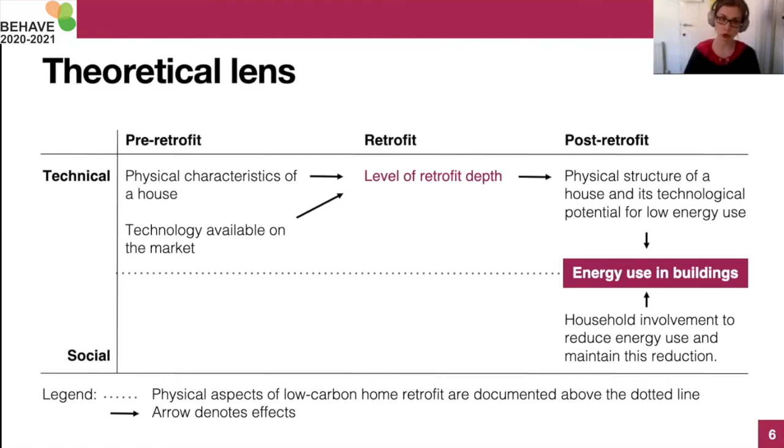In energy retrofit, such socio-technical interactions shape the level of retrofit depth, in pink in my figure, and the level of energy use post-retrofit, also in pink. The known physical aspects of low-carbon retrofit are documented above the dotted line, and other socio-technical aspects will be discovered as the result of the meta-synthesis. So you'll see the same figure filled in when I show you the results.

So we used qualitative meta-synthesis as our literature review methodology. Qualitative meta-synthesis is a systematic approach for collection and analysis of qualitative studies, with the focus of synthesizing their findings with the use of qualitative methods. Meta-synthesis is more than a summary of findings; instead, it offers novel interpretations of findings and a possibility to construct larger narratives than in any individual study.

5 search terms were used: energy, home, retrofit, homeowner, qualitative research. These 5 key terms, together with their synonyms, formed 61 search concepts used in the search. The search recall was more than 1,500 articles, and their titles were scanned.

25 articles depicted qualitative studies on energy retrofit in single-family owner-occupied homes. In only 10 out of these 25 articles were cases presented in great detail, and we needed such level of detail for the application of the process lens to the analysis. These 10 articles constitute a combined sample of 94 cases, and 18 cases depicted energy retrofit in single-family owner-occupied dwellings and were also presented in great detail.

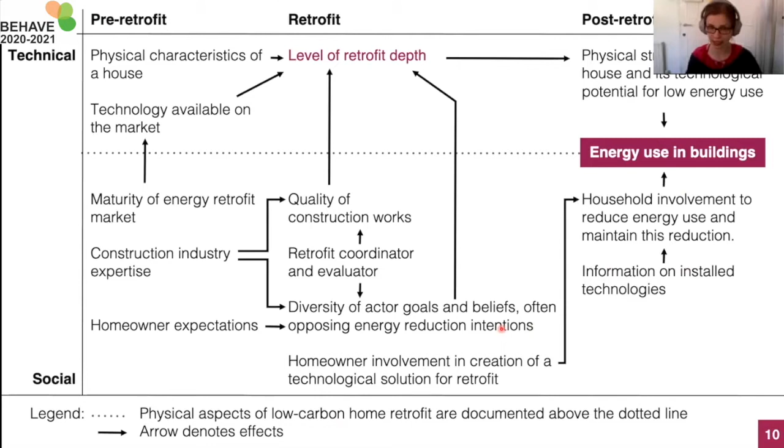So policy implications. The first set of policy recommendations relates to the conception and realization of the deep retrofit solution. So a proximate policy suggestion is to have a project coordinator to coordinate different actors for a given retrofit who would outline a system approach to retrofit.

An ultimate policy suggestion is to build expertise among the retrofit team, develop the market for low carbon technology for retrofit, but also inform homeowner expectations prior to retrofit. A promising route seems to be a proactive delivery of general and house-specific information on deep retrofit options to homeowners by local authorities.

The second set of policy recommendations relates to post-retrofit behavioral change necessary to realize technological potential for carbon savings. A proximate policy suggestion is the provision of relevant information to homeowners on how to operate the installed technology. An ultimate policy suggestion...

is to outline pathways on how occupants, including homeowners, can be actively included in the process of design development, as the meta-synthesis highlighted that the homeowners were more likely to adapt their practices if they were involved in the creation process of a technological solution for retrofit. Maybe the insight is more related to tenants.

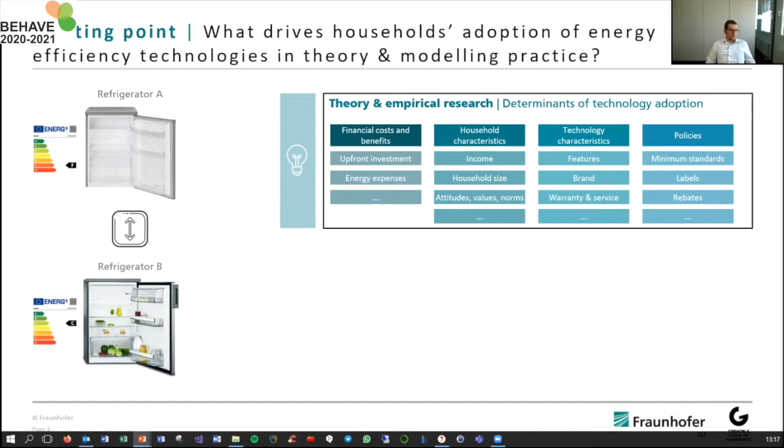So there's a whole range of determinants that at the end of the day set the course for which technology a consumer purchases. This not only applies to refrigerators as in this case, but also to other energy efficiency technologies, be it building renovations, heating systems, etc.

However, when we look at how these very complex decision-making processes are typically modeled in energy simulation models, we most likely end up with a so-called total cost of ownership approach in one way or another. What is quite established in different models, including PRIMES for example, is this approach of measuring the total cost of ownership of one technology option based on investment, energy expenses, discount rate, lifetime, etc. And then calculating a yearly market share - the percentage one technology option has in the overall sales per year. This is quite a common approach, which obviously does not take account of these complexities of purchase decisions.

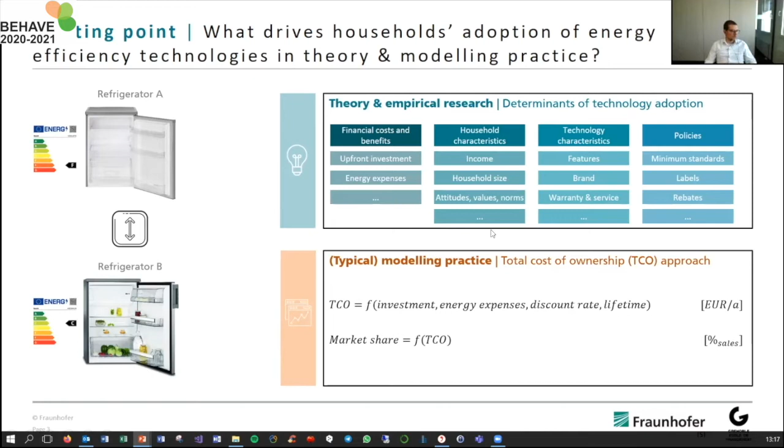Against this background, the objective of our paper and our research was to integrate empirical findings on technology adoption behavior into bottom-up energy simulation models, and based upon that, to measure the long-term effects of major EU energy efficiency policies on adoption and corresponding final energy demand.

Our starting point for this was a literature review in which we, as I just showed in the previous slide, tried to identify the empirical findings on energy efficiency adoption and its determinants.

Second, we carried out comprehensive surveys in which we empirically analyzed the determining factors for technology choice. These surveys were carried out in 8 EU member states. Within these surveys, as I mentioned before, so-called discrete choice experiments were carried out.

Afterwards, the empirical data from the surveys was used to parameterize the investment decision-making in the bottom-up energy demand model FORECAST, which deals with the residential sector in the EU. Finally, we carried out scenario analysis to simulate the long-term adoption of white appliances - refrigerators, freezers, washing machines, etc. - in the EU 28 in response to policy instruments. In my presentation today, I'd like to focus on the survey, the model implications, and the scenario analysis.

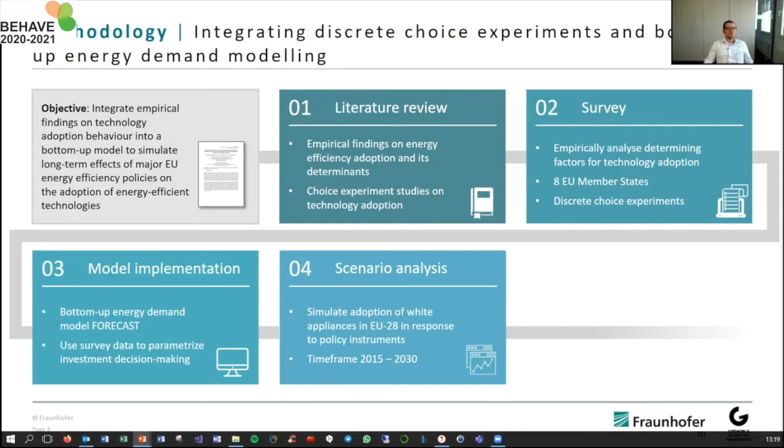So let's have a look at the survey itself. The core of our empirical research were these large representative household surveys. These were carried out in formerly 8, now 7 EU countries plus the UK. Data collection took place between July and August 2018. We had a total sample of about 5,000 households in the end that we could analyze.

As I said, the core of these surveys were the so-called discrete choice experiments. This is a way to measure hypothetical technology adoption on the side of consumers. That means consumers are presented with various technology options to pick from that differ in terms of price, features, size, dimensions, etc. And then taking all of this data together, this allows us to come up with an overall understanding of what the major determinants are for technology adoption.

So just to show you a couple of key findings from these discrete choice experiments and from the survey: what's perhaps most obvious is that the willingness to pay for higher efficiency classes - for example, for a triple-plus labeled refrigerator - is positive in all countries. That means consumers are more likely to purchase more expensive appliances if there's such a high energy efficiency label. Moreover, we found that subsidies or rebates increase the willingness to pay for high efficiency refrigerators in all countries except the UK.

Let's move forward with the scenario analysis itself. So what did we do here? Basically, we defined a range of 5 scenarios. First, a current policy scenario, which is basically a business-as-usual scenario against which the other ones can be compared.

Second, we investigated the effect of rebates that are dispersed to low-income households for the most energy efficient household appliance available in the respective categories. For example, for refrigerators, this would be the A triple plus category that would receive a rebate.

Third, we did the same, but instead of only dispersing the rebate to low-income households, we did so for all household groups. Fourth, we tightened the so-called minimum energy performance standards, or MEPS.

These were tightened in a way that only the two highest ranking energy efficiency classes available in the market were allowed for sale. And finally, we had a best available technology scenario, which basically represents the upper bound of energy savings, or the technical potential of energy savings possible for the countries investigated.

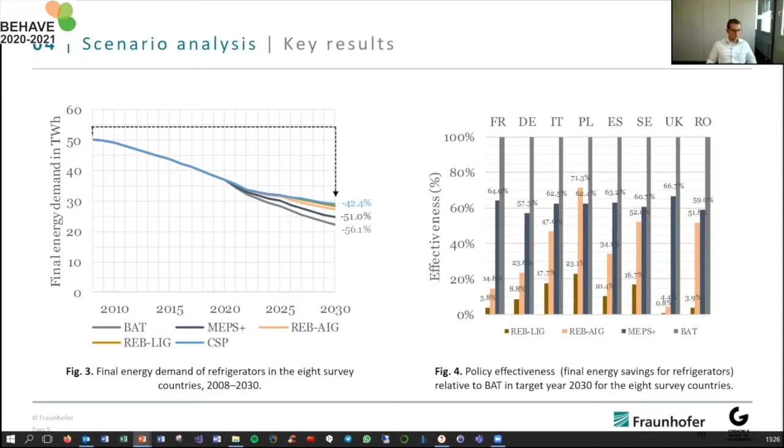So let me conclude on our modeling approach.

On the pro side, the major benefit of this approach is that we have an empirical substantiation of scenario projections. That means we move away from the simplistic approach of using total cost of ownership as a proxy for the actually complex decision-making in the household sector.

Second, we're now able to represent a very diverse set of consumer groups that distinguish in terms of income levels, environmental awareness, and household size.

Third, the results I just showed are just a very small sample of the larger analysis we carried out as part of the Cheetah project, which shows that this approach allows for very detailed policy analysis.

The limitations of this approach are as follows. The coverage of the survey countries was limited to 8 EU countries, while these represent about 75% of the formerly EU 28. There are still some country gaps that we try to fill through cluster analysis.

Second, we have the problem of projecting cross-sectional survey data from a single year, 2018, to future years. Obviously preferences are not set in stone and can change when we look at a long-term perspective until 2030 or even 2050. So it's somewhat questionable to what extent this empirical data can be reasonably used in a long-term view.

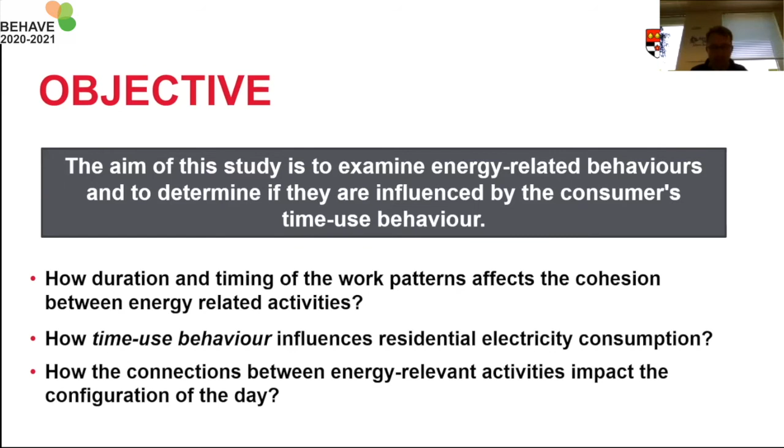Now let's start with the short literature review. Our starting statement is that in order to investigate mechanisms for energy-saving interventions, the use of time should be considered as a key element for the study of residential energy demand.

There is already a large body of research suggesting that efforts to reduce domestic energy demand need to consider people's time use patterns. However, we argue that these researchers examine only a subset of time use behavior, focusing on particular forms of energy such as electricity, leaving the causal impacts of residents' time use behavior on energy consumption unexplored.

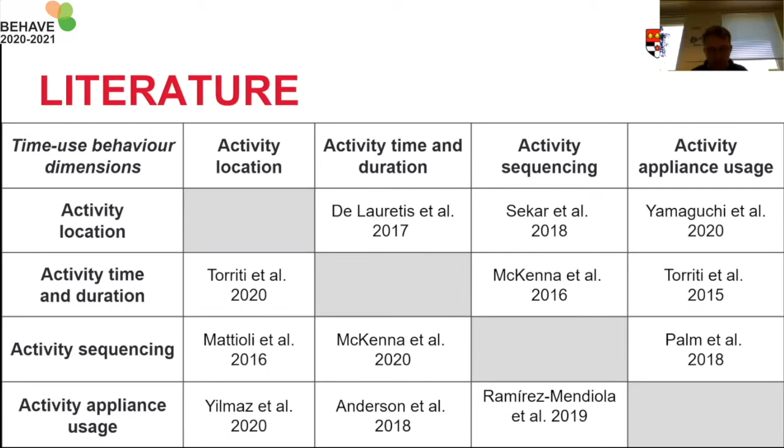What is an energy-relevant activity? Some previous studies aiming to understand residential electricity consumption patterns mainly use national time use surveys. But you need to know that although these time use surveys provide information on the timings of residents' activities, activity duration, and the involvement or absence of other individuals in these activities, they do not provide information on the appliance used to perform each activity.

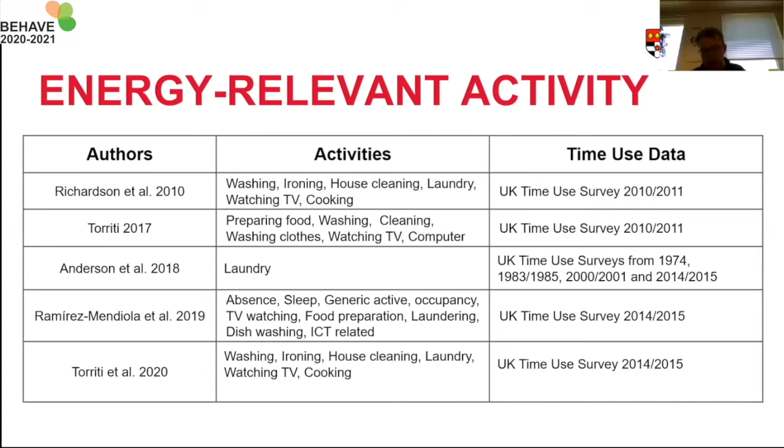Existing research on domestic energy consumption depends mostly on separate data sets, including time use surveys, time budget surveys, household expenditure surveys, or simulated electricity data, and based on this, energy-relevant activities are created. We argue that by relying on different data sets, the energy required to power each activity cannot be accurately assessed.

So this would require introduction of new dimensions that measure or explore time use behavior. So probably you ask me what actually is time use behavior. We argue that the following four interconnected dimensions are used for estimating time use behavior: activity sequencing, activity location, activity time and duration, and activity appliance usage. They are interconnected themselves, and this approach gives insight into everyday activities' characteristics, as well as how residential energy is consumed.

Let's present these four dimensions. First, the activity sequence dimension indicates the order between different types of activities. Second, individuals engage in these activities in different locations, such as home, workplace, or on the bus - this is what defines the activity location. Due to the limited amount of time available, the duration and timing of activities differ as well. A longer amount of time spent on work-related tasks allows less time for other types of leisure-related activity.

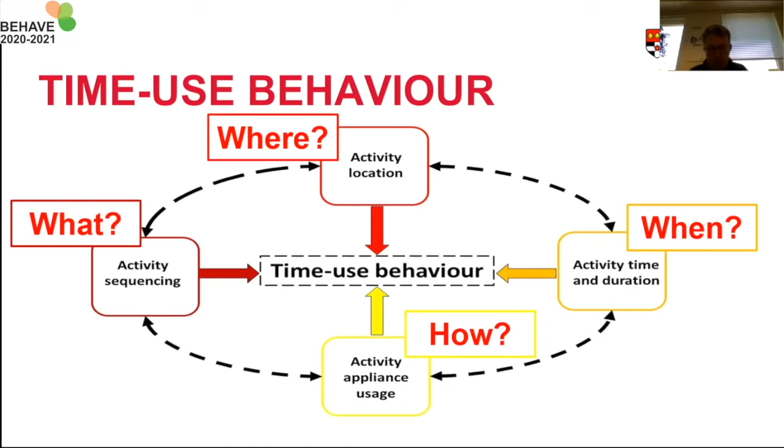In their daily life, individuals use different appliances to facilitate their daily activities, and this is the activity appliance usage dimension. As a result, we suggest that domestic electricity consumption is directly connected with the sequences of activities, activity location, time of operation, and appliances used in activities, which define these dimensions of time use behavior.

Based on this, we wanted to study this. Our initial approach was the time use diaries, the most recent time use diary from the United Kingdom, 2014-2015, as well as the week-long work diaries in which people recorded their different work schedules. The time use diaries and the week-long work diaries were filled in together, so you had to provide at the same day a week-long work diary, a work-day long diary, as well as a time use diary. The second stage was identifying these various work patterns that occur on a weekly basis.

The third step was dividing the sample into two categories based on the weekly duration of work. We divided the sample into those who reported working more than 35 hours during the week and those who worked less than 35 hours during the week. Those reported working less than 35 hours per week are students, parents, retired people, and other part-time workers, but also there are a number of workers who hold two or more part-time jobs. In the other group, mainly we have lone parents and couples with more than one child, and other full-time workers.

The main decision was based on the UK government contracts and employment working hours document definition. However, it's not so clear in the UK what actually means part-time, or how many hours part-time workers need to work.

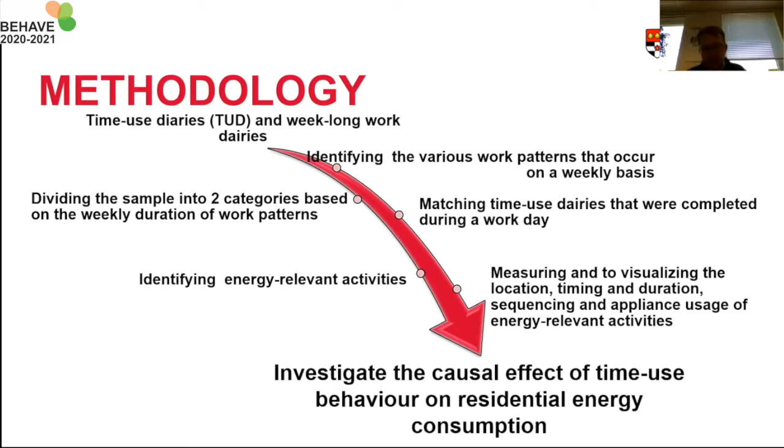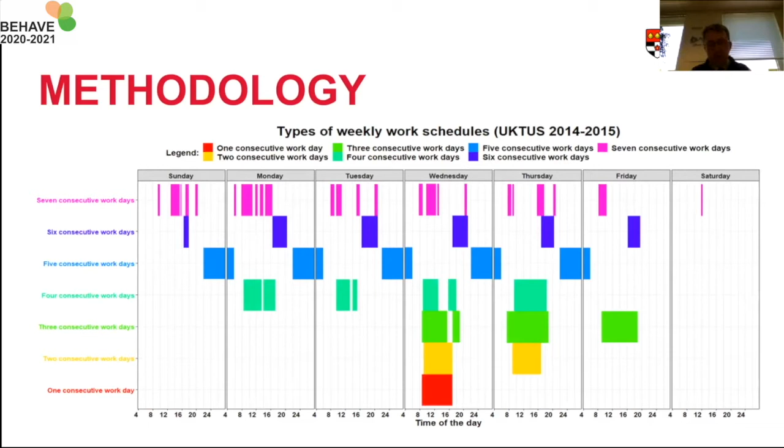Before we jump into the results, I need to tell you what kind of work patterns there are. In this presentation, I'm mainly focusing on consecutive work days, meaning there is no gap between the work days. The week starts on Sunday, and people who started their work on Sunday will end their work schedule on Saturday. Those who started their work on Sunday and work 6 work days will end their work schedule on Friday, and so on. The most important thing is that there are no gaps between the days.

Also in the case of sequencing, what we try to do is introduce the betweenness centrality measures - all our abstract is around the sequence measures and metrics, so I will be very short on this. Betweenness centrality is a widely used measure that captures a person's role in allowing information to pass from one part of the network to another. In this case, it is used to identify energy relevant activities that play a bridge-spanning role in a sequence.

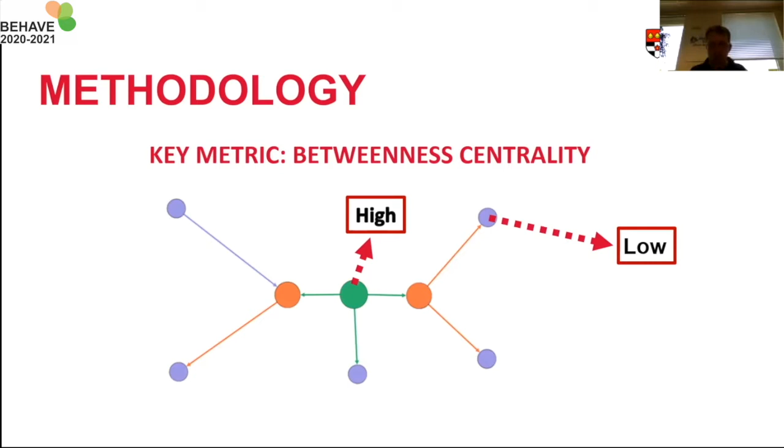Okay, moving forward, results. So this is activity location.

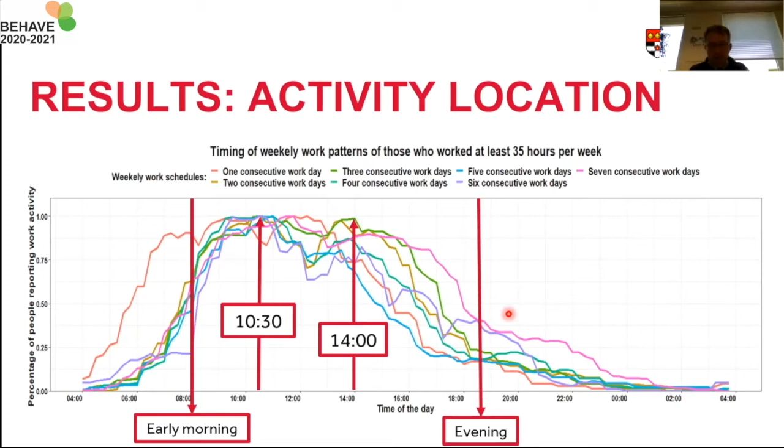In this case, the highest number of people at work is recorded at 11:30, and the afternoon peak occurs around 3:45 p.m.

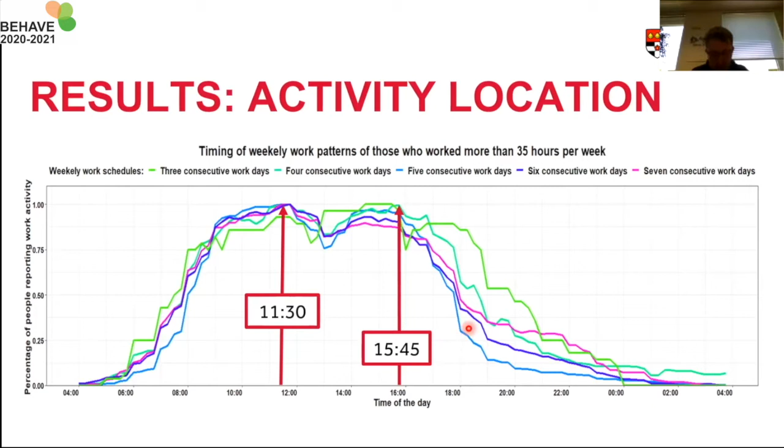Mate, I apologize to interrupt. We need you to conclude. You are already over time.

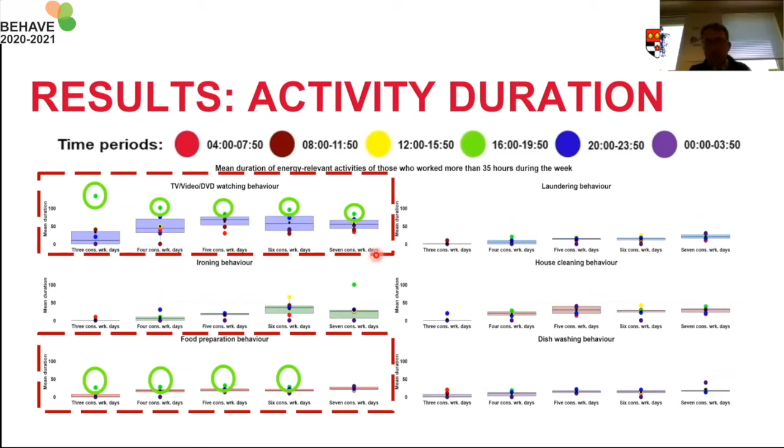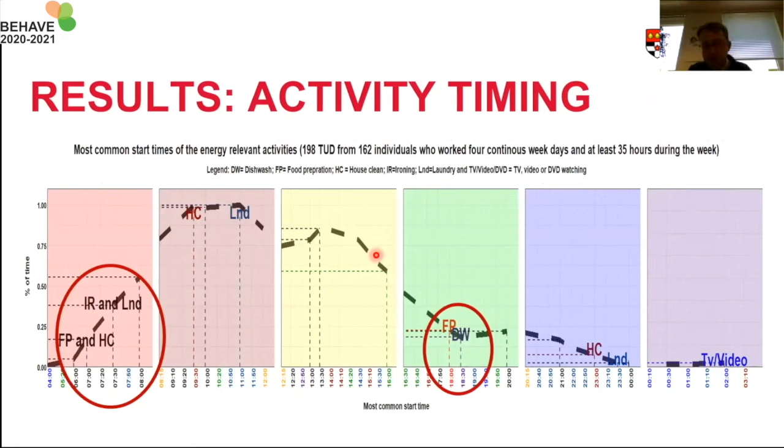Thank you. So basically, what we can observe based on different kinds of measures is that the two different kinds of patterns differ. Also, using the activity timing, we can observe there are some fixed activities that in both samples start at the same time. Moreover, we can observe that some energy relevant activities have the same common starting time.

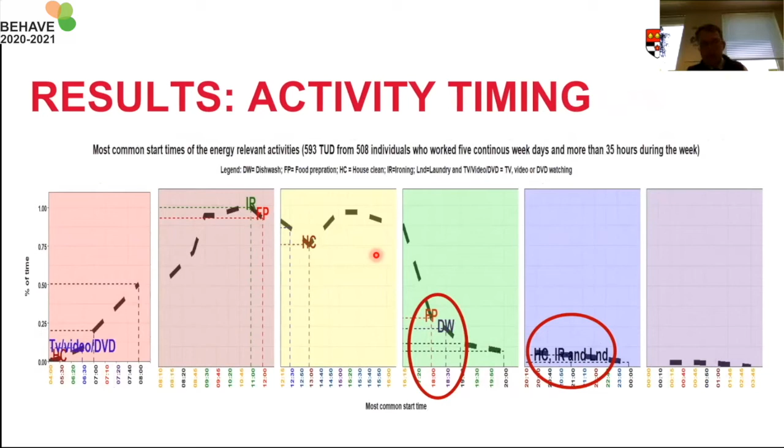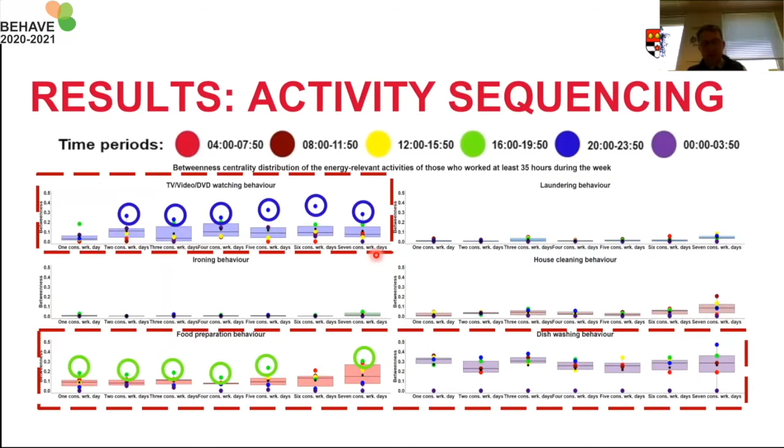The betweenness measures help us see which energy relevant activities connect and which are important during the day. So, just to conclude, this is the time use behavior.

What is suggested by this plot is that in the case of those who reported working at least 35 hours, individuals used the TV to perform their mass media activity. During the 20:00 to 23:50 time period, this consumed approximately 0.103 kilowatts of electricity.

And of course, this could be influenced by different kinds of policy measures. I would argue, from a policy making viewpoint, if we want to reduce this part of energy consumption, we can instruct individuals to perform the mass media activity later or earlier, or to shorten the mass media activity time—this is the duration dimension—or to increase the electricity price during this period—this would be the timing dimension—or to promote more energy efficient appliances.

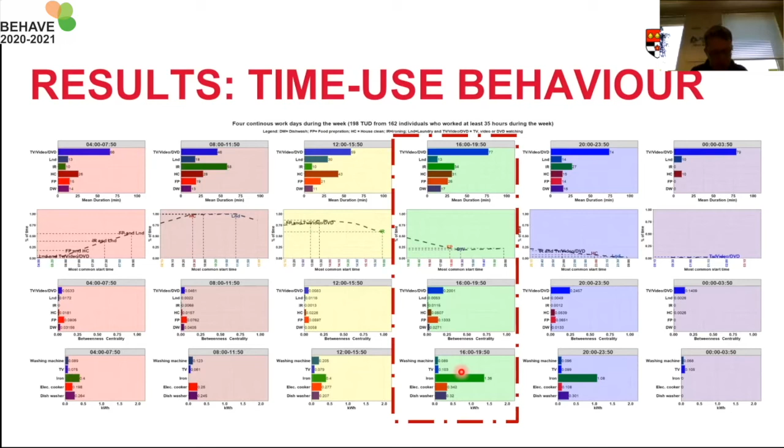So in short, from an academic perspective, the causal effect between time use behavior and residential energy consumption may be influenced by employment status. From a methodological perspective, our framework provides a structure for addressing the causal relationship between time use behavior and residential energy consumption. And finally, from a policy perspective, the development of policies that include the 4 dimensions of time use behavior would allow policymakers to target specific groups of the residential population and steer their behaviors in order to achieve energy savings.

Apologies, Marta. Thank you, Marta, for this last effort to get through in time. Thank you, but interesting results. Let's have time to discuss them at the end.

So let's proceed to the next presenter, Giulia Chersoni. Apologies for not pronouncing it properly. Don't worry. Marta, you need to unshare. Yes, I'm just trying now. Yeah, or Giulia can. Okay, thank you. And Giulia is bringing us an agent-based...

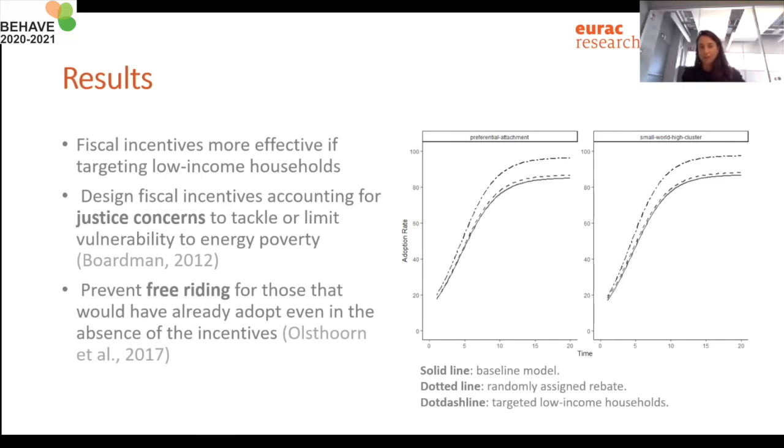So to conclude, we start from the evidence that there exists an energy efficiency gap—a gap between the optimal investment in energy efficiency and what we actually observe.

And we use behavioral economics and innovation diffusion theory to bring into the discourse not just the economics component, but also the heterogeneity in the behavioral components, so the intrinsic motivation that drives the adoption, and also the social structure, the interaction that may affect your choice.

And we combine this theory, these two approaches, into an agent-based model that we use to simulate two different types of intervention. As a conclusion from the results of the policy incentives, what we can say is probably that a combination of behavior-informed and more traditional types of intervention will be more effective in promoting adoption.

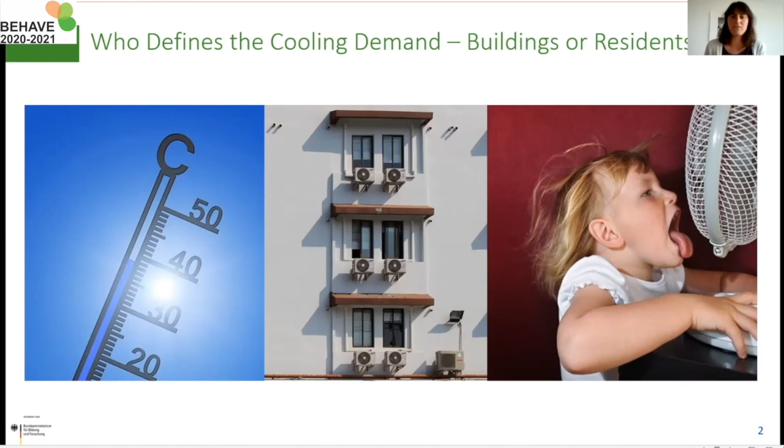So, the question is, who defines the cooling demand? Is it the building or is it the residents? As you all may know, building standards usually define certain temperature thresholds which determine cooling demand and overheating. And usually the residents' feelings or perceived thermal comfort are not taken into account.

So we set up a mixed method study in Munich, Germany, where we wanted to compare the computer simulation of cooling demand and heat stress with temperature measurements in different apartments and households, and the people's own perception of heat in their indoor environment.

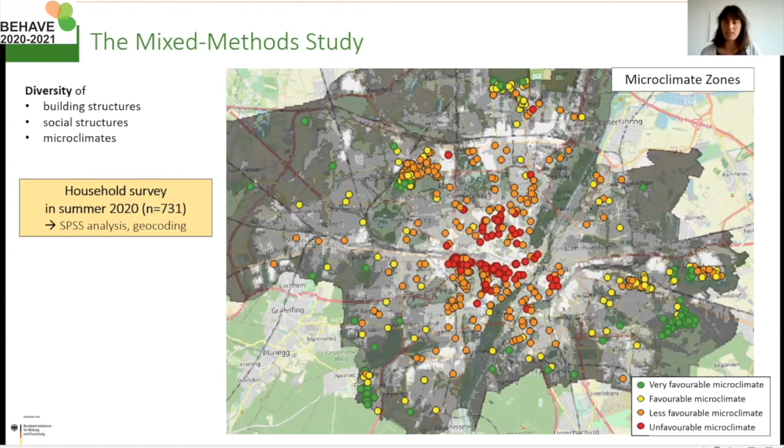We conducted a large household survey among more than 700 participants all over the city. As you can see, they comprise different building structures, social groups, and also microclimates that are on the map. More than 340 of those households also volunteered to measure the temperatures in their bedrooms for 2 months.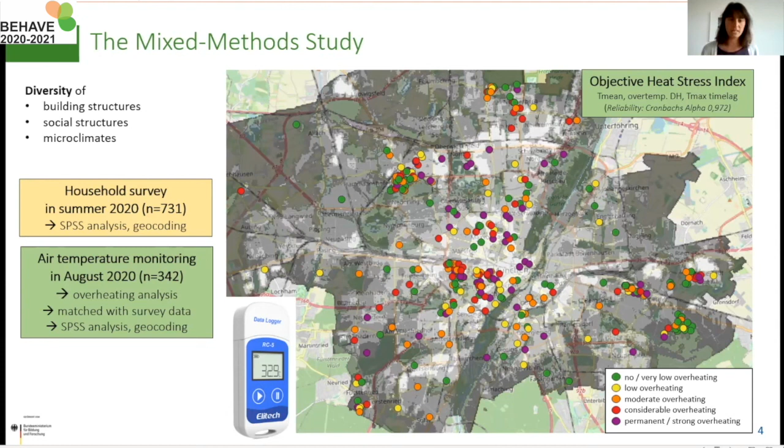During the summer of 2020, from July till September last year, we matched the survey data, their answers and perception, to these temperature measurements. And we created two heat stress indices: one subjective heat stress index and cooling demand, and an objective heat stress index based on the temperature measurements with those data loggers that you can see here on the left.

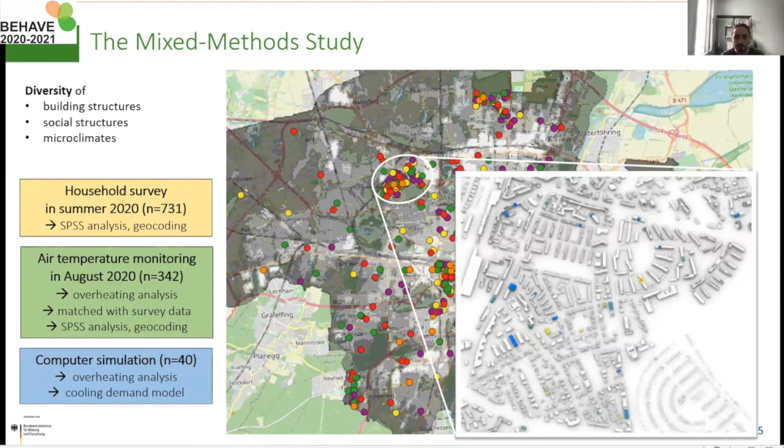Thank you, Giulia. In order to compute the cooling demand, we performed an urban energy simulation with UMI. UMI stands for Urban Modeling Interface, developed by MIT, Massachusetts Institute of Technology, and is based on the EnergyPlus building energy simulation. On the right side, you can see the simulated city district in UMI, and the investigated buildings are highlighted in different colors.

The UMI simulations are based on 3D city models. We got CityGML data from the city of Munich, which also included the building age classes. The boundary conditions for the simulations were, for instance, the weather data, which is the test reference year for Munich. The building geometries come directly from the CityGML data.

The materials and windows we assigned to the simulations are based on the building age classes of these different buildings. Other simulation boundaries, like the air exchange rate, are based on assumptions and standards from the German norms. We also included the effect of shading from surrounding buildings, and as you can see, all the buildings in that district were included, so we could simulate the shading by the surrounding buildings.

The threshold for calculating the overheating hours and the cooling demand is defined by the German standard for Munich, which is 26 degrees. The overheating hours simply mean the amount of hours that are above this threshold of 26 degrees.

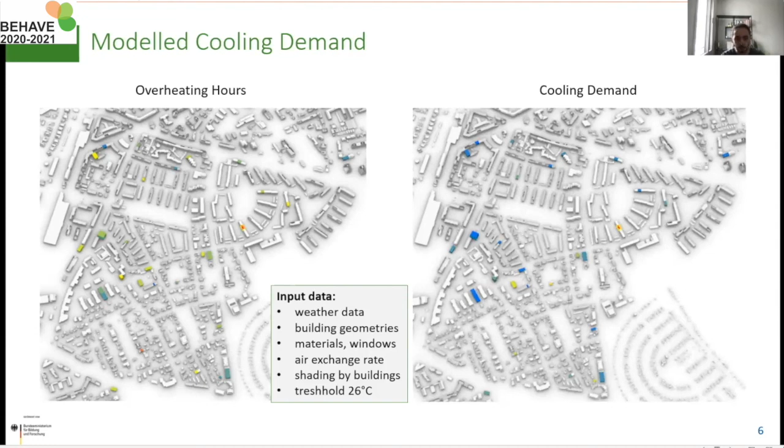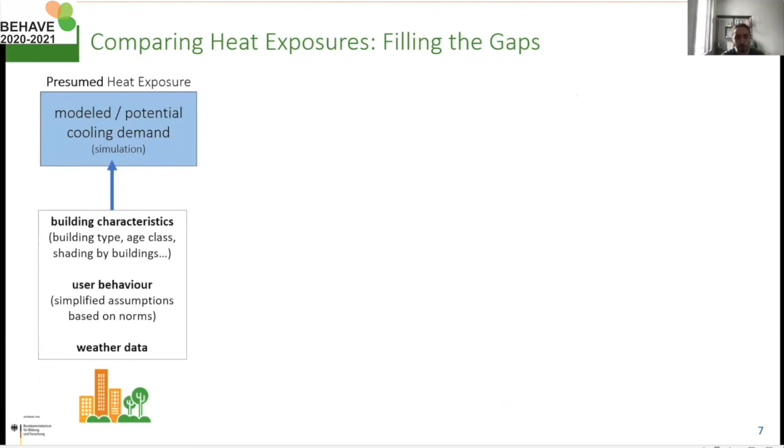So on one side, we have our urban energy simulation, performed with UMI, which included the different building characteristics and also the simplified user behavior based on norms and standards and the test reference year weather data.

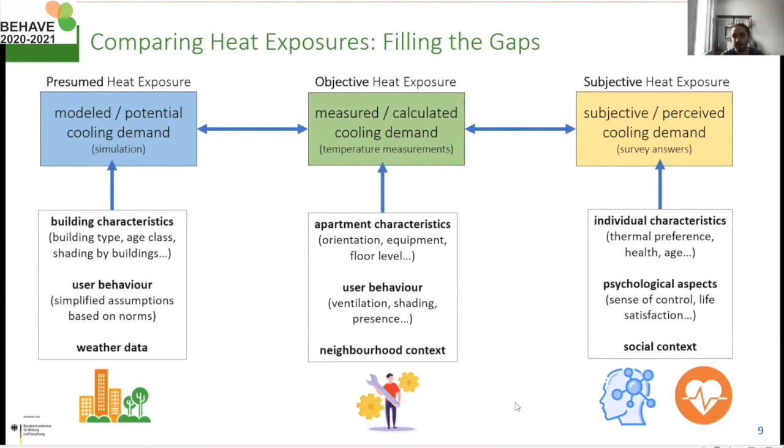In the middle, we have the logger data, divided into the different apartments that we investigated. Through these loggers we also considered, for instance, the apartment characteristics, the actual user behavior, and the neighborhood context. At the end, we have our survey data, in which many different questions were surveyed, including individual characteristics like thermal preference, health, age, different psychological aspects, and social context.

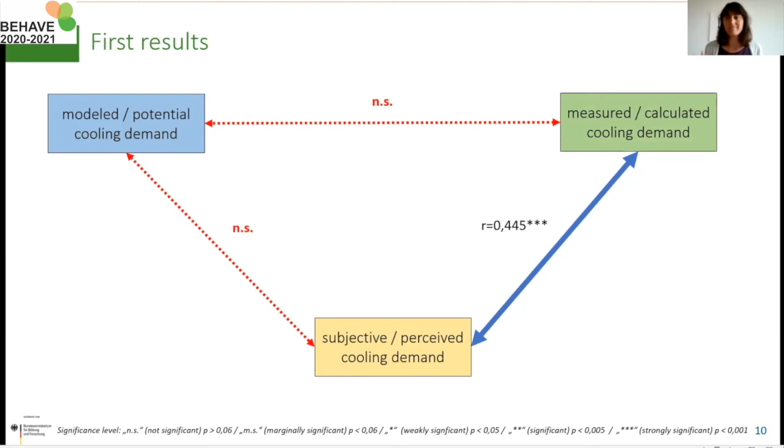Thank you, Farzan. On to the results: we were quite disappointed and surprised at first when we saw, in the first exploratory analysis, that there were no significant correlations between the computer-modeled overheating and cooling demand and the measurements, the temperature measurements, or the perceived heat exposure. So there were no significant correlations, and we were asking why.

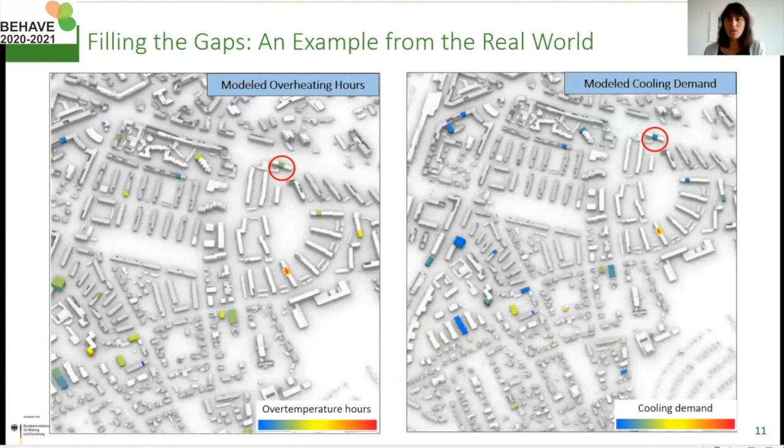So let's have a look at one example. Here you can see the computer simulation results, the modeled overheating hours and cooling demand of one building, for example in the red circle, and those are quite low, meaning the building is usually not very prone to overheating. Comparing this to the temperature measurements, we see that they are also quite low.

From the survey we know it's a 2-room apartment on the 4th floor with a Western orientation, and there is no heat protection available, so no shutters, no air conditioning, no awnings, only curtains. The person who lives there also uses an automatic fan and practices cross ventilation at night, which might contribute to the low temperatures.

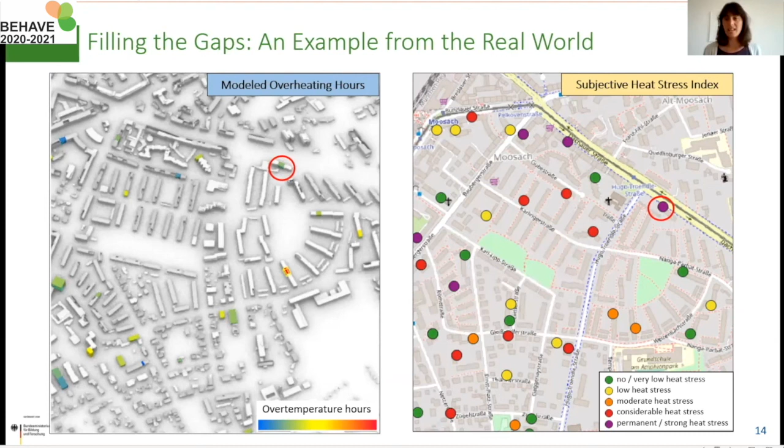But if we compare this now to the perceived heat stress and cooling demand of the person, we see that it's quite high. So this is due to individual characteristics and satisfaction.

We know from the survey that it's a 59-year-old lady who lives there, and she's not at all satisfied with her apartment, nor with the neighborhood, nor with her control over the thermal environment. She has poor health also, and she would really like to have air conditioning and shutters.

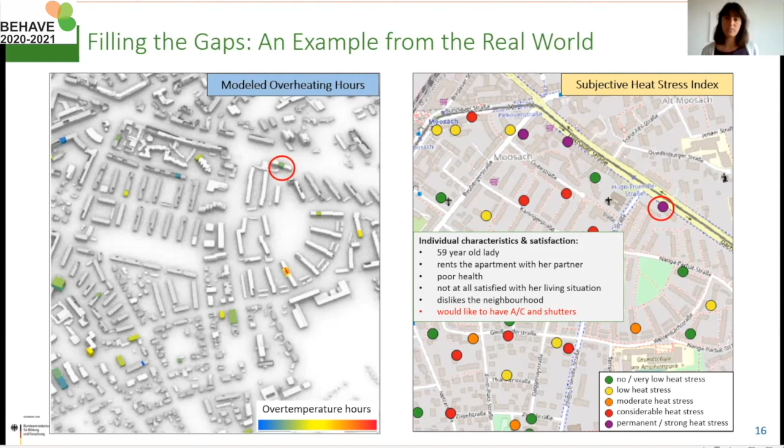So we see how the level of control and thermal preferences contribute or create a cooling demand, a personal cooling demand, where neither the temperature measurements nor the simulation would have predicted this. To sum it up, the devil is in the details, as most of the time.

We have found two main reasons why there is no strong correlation between those measurements and survey results and the computer model. One is that the indoor temperatures here are mostly or most strongly influenced by the apartment characteristics and not the building characteristics. Second, the subjective cooling demand and perceived heat stress is mostly and most strongly influenced by the level of control and satisfaction with control.

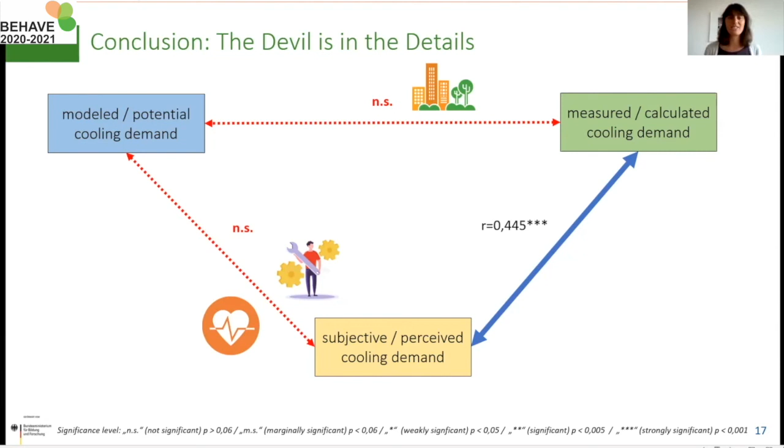And also individual thermal preferences, for example. And all those are not taken into account by the computer simulation model. So this explains why, but on the other hand, this leaves us with the question: is the computer simulation and cooling demand that is usually used actually useful, or do we need something different?

So yeah, thank you for your questions, or maybe in the chat.

Thank you, Giulia and Farzan. You didn't use all the time, so you have 2 minutes left. And since you are the last presenters and discussion has been ongoing, very rich in the chat, I would like to ask everyone to put some questions to the last presenters, to Giulia and Farzan. Don't know if anyone has questions for them.

If no one comes forward, I will ask you something. Modeling, as you know, and it's the title of the session, is important also for policy development. Based on your results, what would be your main advice to, I think, Munich municipality or those organizations leading or in charge of energy efficiency in buildings in Germany, which I believe is your main study area?

Farzan, do you want to answer? Well, in my opinion, the most important advice would be don't rely on computer simulations only. Maybe this is the most basic advice, but we really found that in Munich, for example, or in the whole of Germany, air conditioning is not very widespread. So that means cooling demand and energy demand really depend on whether people have air conditioning at home or not, and how much they use it.